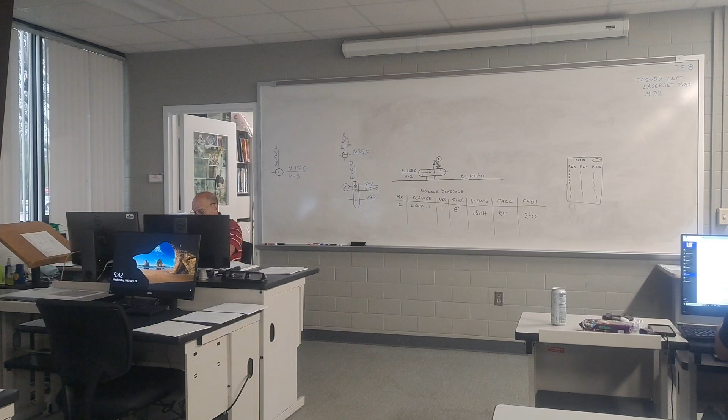So I've got some blank fitting makeup exercises, not tonight, y'all can take it home with you and work on it. I've got some of the blank fitting makeup handouts right up here, so y'all can take those with you and go home and work on it.

I want these back at the beginning of class next week. That way you've got time to possibly look at it, see if there's anything you do or do not understand, and see about making those corrections and getting them back to you.

So on these fitting makeup exercises, like I said, I have not recorded these grades. So whether it's this, or you take it and make changes, corrections, whatever, get those back to me so that I can record these grades. So right now, it's like they were never turned in.

You get a mulligan if you need it. All right, Colton?

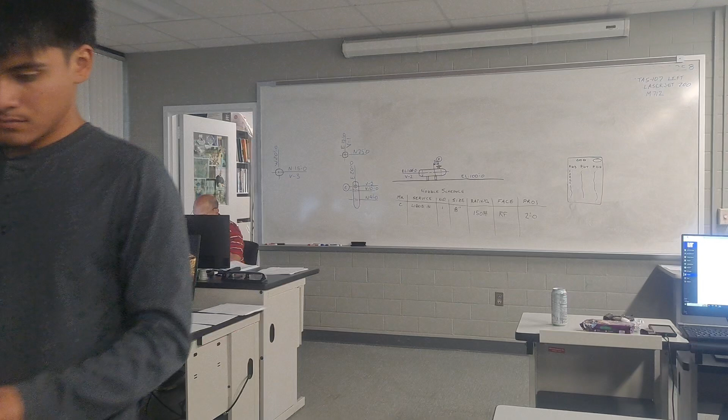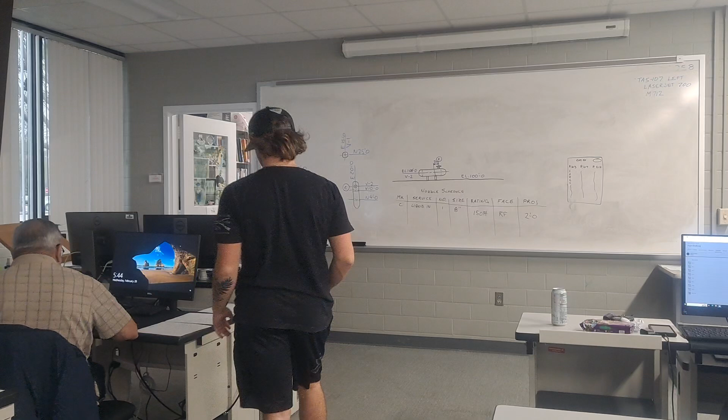Scott? You already gave me mine Friday. I got some other stuff for you too. Okay. Yeah. Hey Scott, do me a favor, move those 3 stacks up here, please.

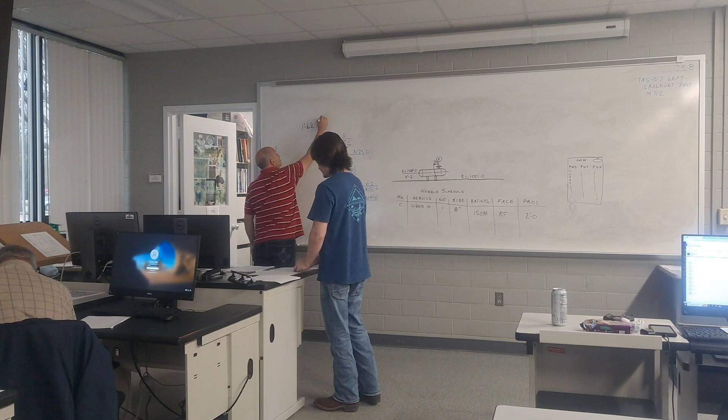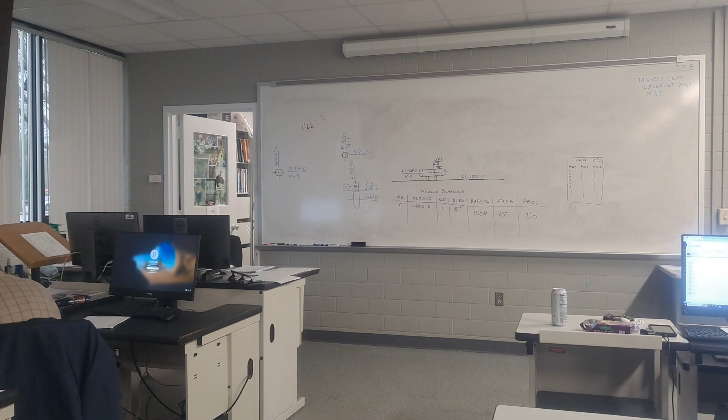If it is circled and has 1/2 written next to it, don't come up and say, but Mr. P, that's what I put there, was 6.5. No, that half means it is half off. That means you were within an inch of the correct measurement. If you have a red X through it, that means you're at least an inch plus off, incorrect.

So like I tell y'all about my self-checking, I want the same answer twice. I want to see the same answer repeated. That tells me that either I'm wrong twice, or for me, it's confirmation that it's correct.

So now that you've had time away from it, now would not be the time to go back and look at what you did last time and say, where did I make the mistake? Now would be a good chance to say, okay, I missed this one, it's got an X through it, it's more than an inch off. It's got a circle on it with a 1/2 next to it, meaning it's half off, so I'm within an inch. I would say, don't try to figure out the mistake yet.

Go through and do the math again from scratch. Look up the numbers, you got another whole week.

We're gonna talk about your chapter 8, 9 exercises. We're gonna review for your test next week over chapters 5, 6, and 7 reviews, and then chapter 9 exercises. The chapter 9 exercises, once maybe I give you some tips here in a little bit, maybe all that will clear up for you, and give you time to work on these over the next week.

Alright, so everybody clear about the instructions on those? What was some of the other stuff I may have rung up on that?

Oh, feet and inches. So if I rang you up for feet and inches, that also counted into your points off. Feet and inches means that you said 6 inches plus 8 inches plus 3 1/4 inches is so-and-so inches.

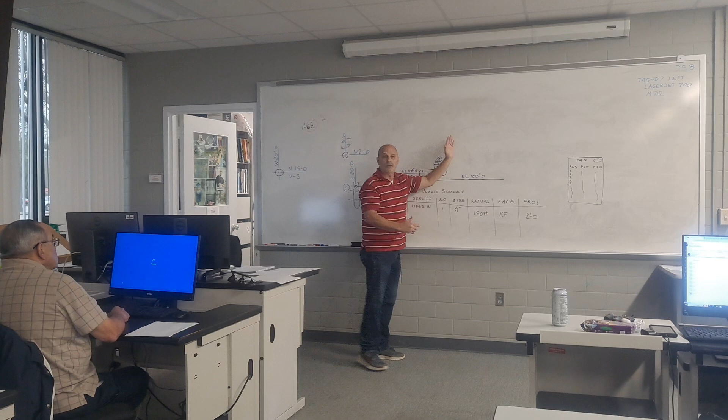You saw it in the control valve manifold. We don't need that measurement. It's usually not shown because there's an elbow, a reducer, a flange, gasket, valve, gasket, flange, reducer, elbow. It's fitting makeup. We don't measure that out. So little things like that, being able to add up and look up those correct fittings and the correct measurement needed is a big part of pipe drafting.

On your chapter 9 exercises, whenever you turn it in, you can use the same blank master I gave you for your chapter reviews. It has the chapter at the top, this will just be chapter 9 exercises, then your regular name and everything at the top corner. Make 3 columns, one for each of those 3 pages we're about to talk about. You've got 10 measurements to look up on each one. Just tell me 1 through 10, but put it all on one page so it's easier to reference back to and talk about how you may have made a mistake. Also just to see if you follow instructions.

So what you've got at the end of chapter 9, now we're starting to take all those different components we've been learning about, all those different fittings and pipe symbols we've been trying to absorb and learn what they mean and what they tell us on a drawing. Now we're starting to look at bringing all of them together and putting them together.

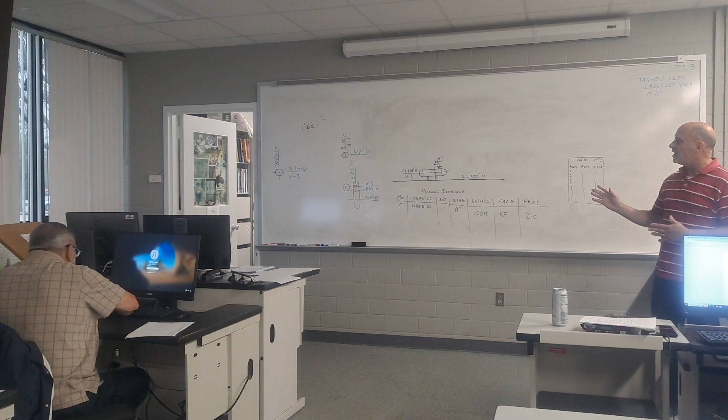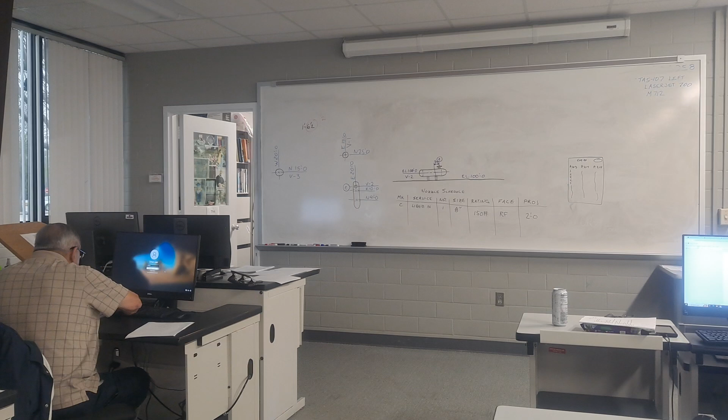So as a pipe drafter, one of the first things we have to do is find the equipment. Our pipe doesn't just start in space, your pipe is gonna start somewhere. Usually your pipe goes from equipment to equipment. You might not be doing the whole phase of that pipe going through it, but the normal pipe run, they call it a spool piece, similar to a spool that you can get thread or string on, has the fat ends on it. That's similar to a spool piece. That's where this term spool piece comes from, because we have a flange on each end.

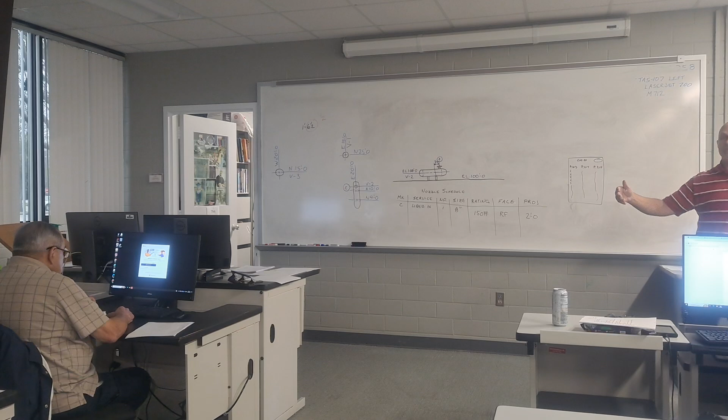That way they can bring that out to the refinery after it's been fabricated, painted, galvanized, whatever else, tested, x-rayed, bring it out to the refinery, put it up where we can't weld, we can't burn, we can't grind, put it into place, drop some gaskets in, bolt it up, boom, move on to the next one. So that's where the term spool piece comes from.

So as a pipe drafter, it isn't gonna be just a flange on this end, a flange on this end, and a piece of pipe in between. It's gonna be a flange on this end and another flange on the other end at a piece of equipment. And then somewhere in between, it's gonna have a bunch of other stuff probably happening. Elbows, T's, reducers, maybe some other lines coming off, stubbing out of it. We're gonna have valving. We might have some of these control valve manifolds in that run.

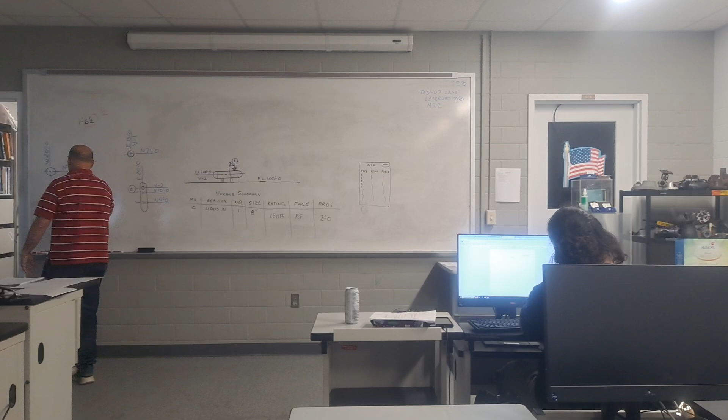So the pipe drafter goes through and says, okay, I'm going from this piece of equipment to this piece of equipment. Next semester we'll do chapter 10 in the advanced pipe class. But if you look through chapter 10, we're not gonna do the chapter review on chapter 10, so don't forget that from real early in the semester. If you work ahead, you don't have to do the chapter 10 review, we don't do that one, we pretty much skip over chapter 10. That's your spring break assignment actually, to look through chapter 10. We come back and do chapter 10 next semester.

So chapter 10 is very similar to where if you were in industry in an engineering department, in a pipe drafting engineering department at a petrochem facility, that is similar to the packet that would be given out to you. It's got what we call vendor data drawings, which is where we look up the different pieces of equipment to find out information about where our pipe is attaching to.

We've got different layouts of the facility that we'll go through and look at, here's everything, here's all these pipes. So if you can envision a bowl of spaghetti, looking down into that bowl of spaghetti, lots of times that's what these facilities look like. Every now and then you've got a meatball, that's your different vessels and stuff out there. But mainly it's just a bunch of, looks like spaghetti running around in there. You as a pipe drafter have to look at that spaghetti and say, okay, here's my pipe going from here to here.

It's not that easy, but what we do is go to what's called a pipeline list. That's our first stop. We go there and say, okay, the boss said I'm doing pipes number 5, 6, and 7. So you look on that pipeline list. It says pipe number 5 comes from this piece of equipment to this piece of equipment, pipe number 6 to this piece of equipment.

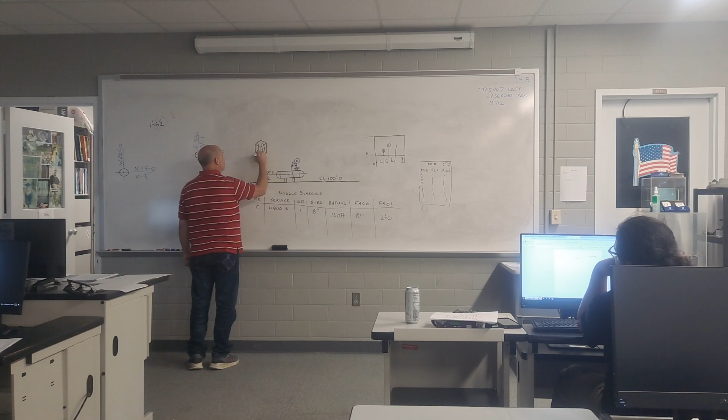Because once you get inside that refinery, they have what's called a benchmark, which is usually a concrete column, a concrete pier. It usually has some pipe bollards around it, kind of like what you see when you pull up at a convenience store to keep people from driving through the building—they're gonna have it well protected. They're gonna call that point 0, 0.

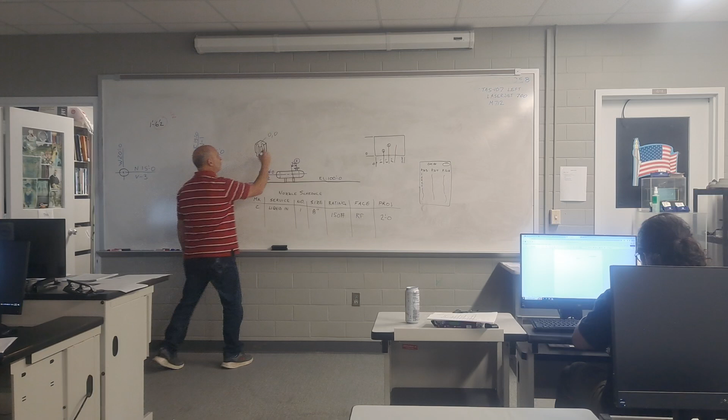They're going to give that a rough elevation of 100.0 feet. It's not a true elevation above sea level. Trust me, around here, you're not going to see 100-foot elevation in southeast Texas, not till you head up north, probably close to Jasper, or at least above Silsbee. So that is just a rough number that we use.

But what it does is it allows us to go out there and dig up to 100 feet if we drive some piers, some columns down in there to support all these big vessels. 100 feet is not a lot when you're talking about supporting that much weight and that much height. Some of these towers you see in these refineries, you would not believe what goes on underground right there.

So once we get out there, that 100-foot called elevation guarantees that we're probably not going to get into negative numbers. When I go out there and tell them to drive that pier down, and they're bidding that project, they say, well, how deep does it need to go? It needs to go to elevation 50-foot zero.

They know it's not an elevation above sea level, it's worked off that little thing out there, that little monument, that benchmark, with a little plaque on top that says this point right here, if you put your finger right here, you're putting your finger on 0,0 for this facility. You're putting your finger on 100-foot zero for this facility.

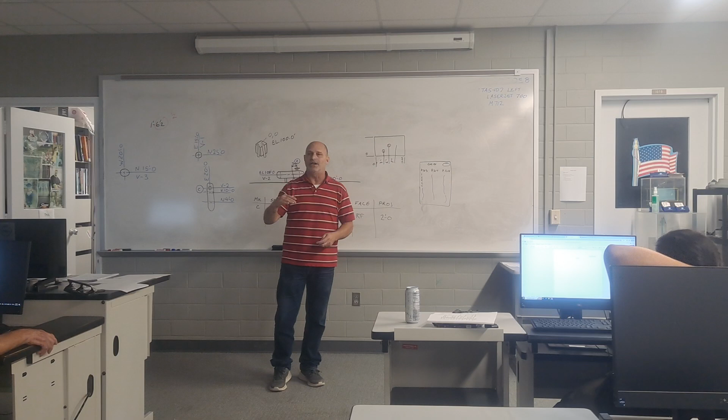So we go out there and tell them we need a pier that's down to 80 feet. We're not giving them negative numbers. We're not asking someone out there in the sweat and the heat and the mosquitoes and the mud to start doing math before doing something as critical as driving that pier down. So having that 100-foot zero guarantees we're not going to get into any negative numbers or require anybody in those conditions to do math on the fly to make sure something works. So this point will also be considered 0,0.

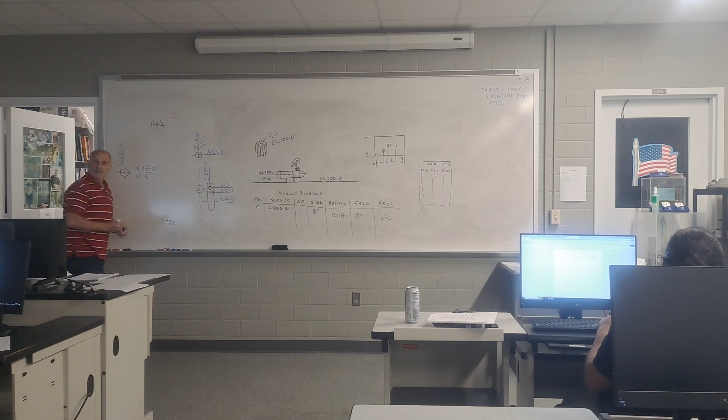So when I look at this vessel and it says the center of this vessel is at north coordinate 25-foot 0, east coordinate 15-foot 0, that vessel's name is V1, I can work off of that as a pipe drafter. But if it makes you feel better, just say there's some point out there, some little concrete pier, that has a coordinate of 0,0. So if I were standing at that coordinate and I walked east 15 foot, and then walked north 25 feet, I'm going to be at the center of that vessel.

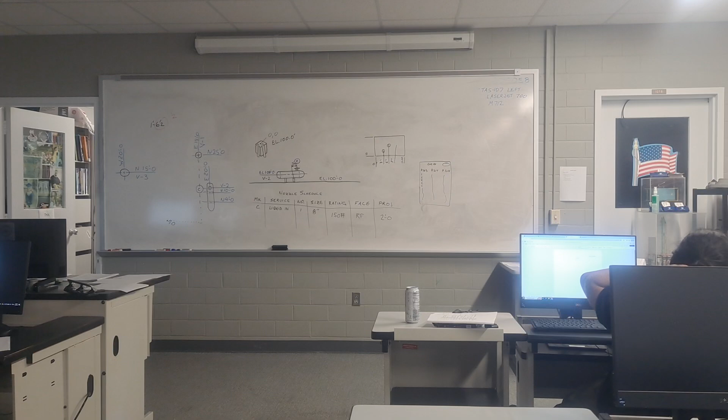2 decimals of a foot is what we can go to. That allows me to tell someone where to go to an exact location inside that facility. They can have some kind of instrument that will reflect back to that monument and say you are this far, just like we do with our phones, just like GPS that's based on global satellites. This is based on that little marker somewhere inside that refinery.

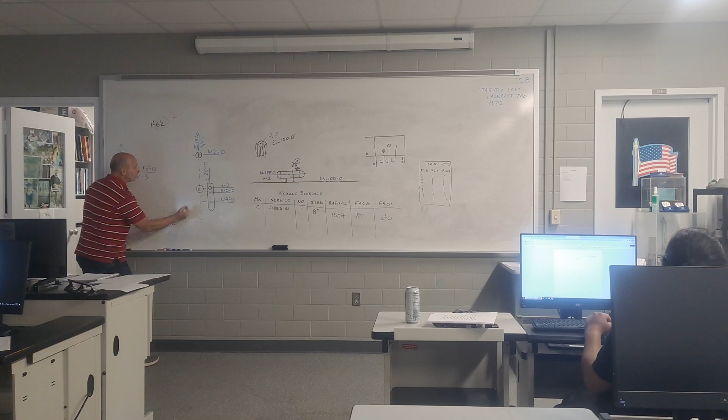So if it helps you to work on these, get out a piece of graph paper and make a dot somewhere and say okay, that's 0,0. This coordinate means, instead of cluttering the drawing with all these dimensions, we're just giving you information from a point called 0,0 on how to get there: north, south, east, or west. It simply says walk north or south this far, walk east or west this far.

You will find that piece that you're looking for. And we're not talking about 30 or 40 foot, we're talking about inside a refinery - 2,000 feet north, 1,753 foot 2 and 7/16 to the east. And they're going to be able to find whatever it is they're looking for. Maybe it's something big like a vessel, they see it way before they get there.

Maybe it's something small like a valve, or a hand washing station went out. We can tell them using these coordinates exactly how to get there. We're not going to say go 3 roads down through this facility, this rack right here, take a right on that road. No, because someone may get off in a unit that they're not supposed to be in.

When I was at Unica, I worked construction. Me and the guys were walking to the dining hall over there inside the refinery.

We're like, and that rotten egg smell can't be good. I don't remember what chemical it was, but we were shortcutting to the dining hall. We walked right through a very harmful area, as far as, you're supposed to have breathing apparatus when you walk through. It can't be good, it smells like rotten egg. That's one of those bad smells you ain't supposed to smell. So we took a big deep breath and walked on through.

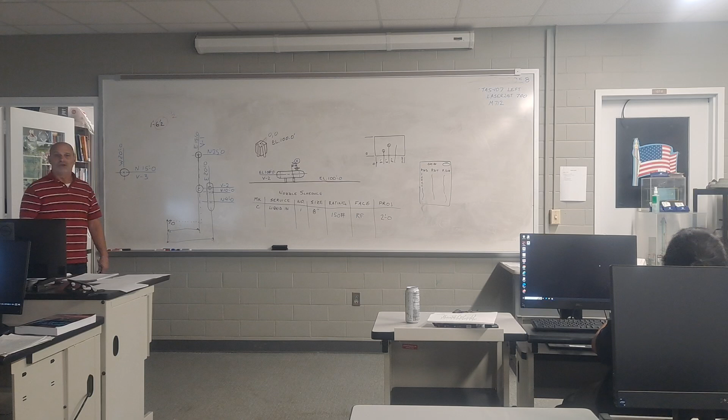But we don't want people doing that. We don't want them to accidentally do that, or turn a truck onto a road that they think is a road because we said go down three roads, but this was just a turn-in. They thought it was a road, so they threw the boom around the corner, and by the time they can see around the corner, they've already done some damage to something.

So this gives us a tracking point to be able to locate items out there. And like I said, envisioning a point called 0,0 will help you.

What questions we might have is, what's the north-south distance between V1 and V3? We look over at V1, we find our north-south coordinate there. We look over at V3, we find our north-south coordinate there. What I always recommend is write them down. Write one of them down, then look at your second one and say, is it bigger or smaller? If it's smaller, write it below it.

That's just a habit I picked up, something I learned to make it easier on me, to always have that larger number on top. So I'll get a blank piece of paper with lines on it, and write one coordinate down once I find it, instead of trying to find both of them and hold my fingers on it. You're gonna see on page 214, it isn't that easy.

You can't just look right there, there's one of them, look right there, there's the other. No, you're gonna be flipping through chapters, so you write both of them down. Our rule is, if the coordinates are the same, like coordinates, north and north, the rule is subtract to find that measurement between.

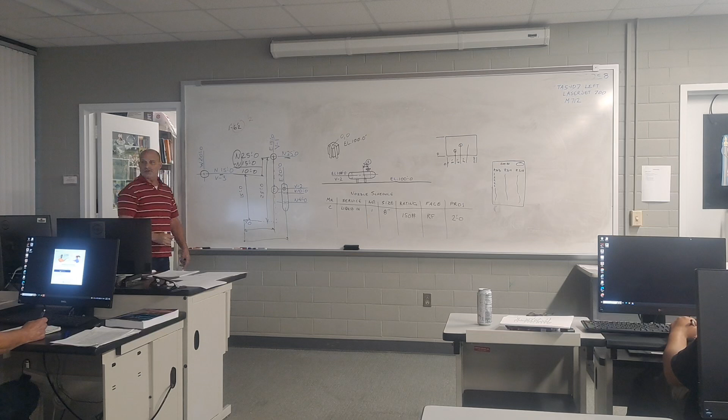Well, if this is 25 and this is 15, I can visually see that, okay, yes, I did the math right, that number should be smaller, I should be subtracting. So it may help to have that visual of 0,0, showing this 25 foot 0 means go to the north from this point, 25 feet. Go to the east from this point, 15 feet. If it helps having that graph paper with that 0,0 on there, feel free to do it, because there's a lot of room for error on this assignment.

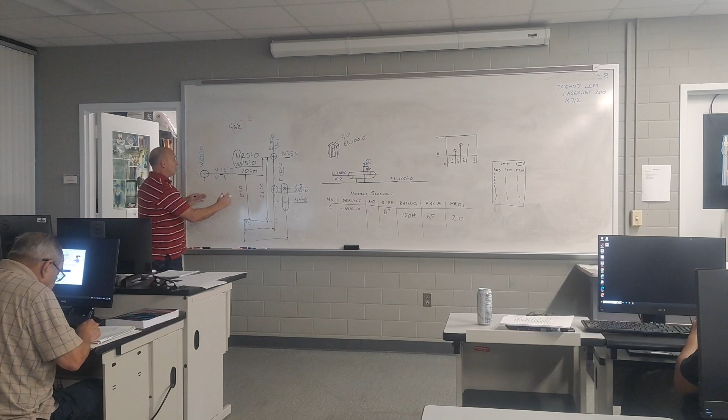So maybe I have the question of, what's the measurement between V1 and V3, the east-west coordinate? I look at V1, I pull an east coordinate of 15 foot 0. I look over here at V3, I pull a west coordinate, it's larger, 20 foot 0, so I write it on top. Unlike coordinates, we add 20 plus 15, 35 feet between them. That would be the answer to that.

Once again, this vessel says from this point, go to the east 15 foot 0 to get to the center. This vessel says from that same point, 0,0, go to the west 20 feet. So this measurement is 20 feet over, this one is 15 feet over. The overall measurement, visibly, I can see that I should add those. Like I said, a lot of room for error.

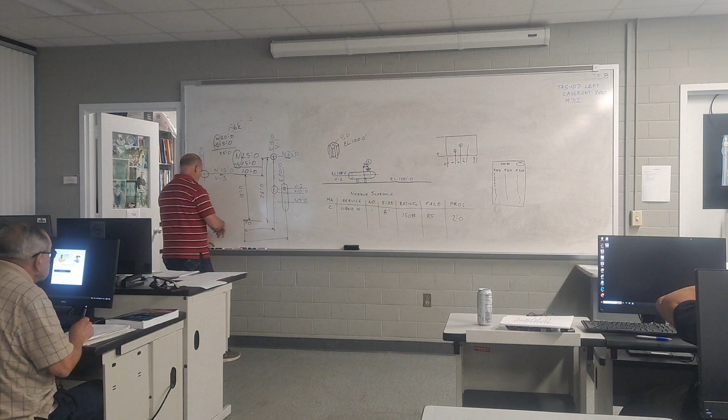Here's another place where people make mistakes. Remember, all this is gonna be a plan view. Anytime we're looking at these coordinates, unless we're told otherwise, we're understood to have north vertically up.

So on this vessel right here, if I were to ask you, what is the north-south distance between nozzle C on vessel V2 and V1, the center of V1? You look over at V1, you say, okay, here's my coordinate here, north 25 foot 0. Then nozzle C on vessel 2, here's vessel 2, here's nozzle C, coming right here in the middle of it. So I've got some coordinates running through it, but this north coordinate does not go through the center of my vessel, or the center of my nozzle. That north coordinate, let me write this up here to look a little bit better for you.

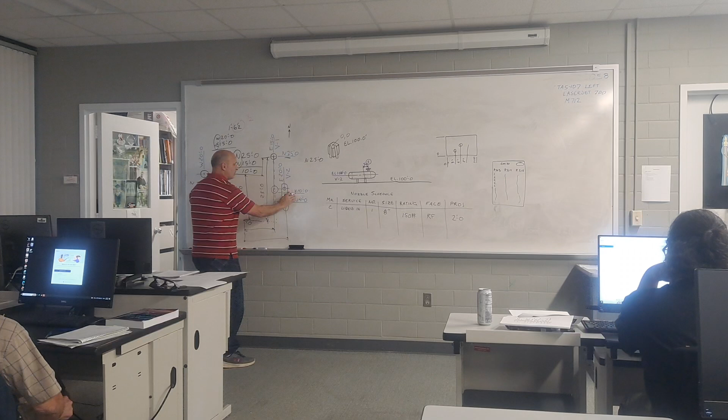There isn't a north coordinate on nozzle C. So some people say, well, I got a north coordinate on this end, there's one right there by it, north 10'0". Like coordinates, I'm gonna subtract 15'0" and move on.

That did not get the information you needed. You need a coordinate on this end and a coordinate on this end. You don't have a coordinate on this end. You've got a coordinate near there.

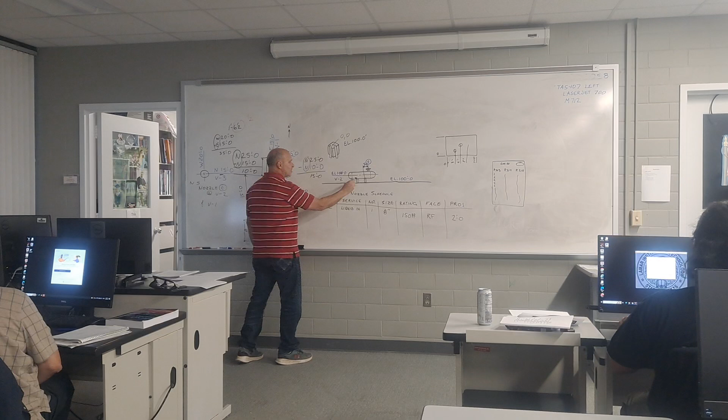So in a condition like this, what I would have to do is something we learned about in chapter 6, the vendor data drawings. I would have to go over to the vendor data drawing for this vessel, which I did a little sketch of over here. And I said, okay, this vessel, here's my side view of my vessel. Here's some concrete supports underneath it. Here's my walking surface out in that facility.

We've got an elevation down there. We've got an elevation at the center of the vessel. We look over here, there's our nozzle C. There is a measurement from that support underneath that vessel, that concrete support, just like we have in this glass box over here, just like they have in your chapter 6. That concrete support, those legs underneath that vessel.

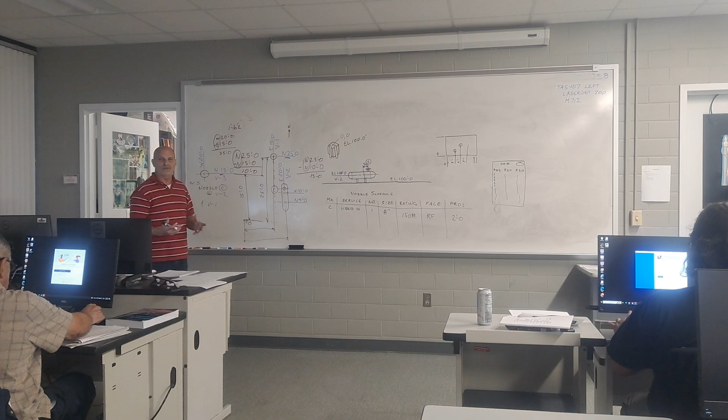We have a coordinate right through the center. Now we have a measurement from there to our nozzle. Mr. P, why did they put that coordinate there? Why didn't they just put it in our nozzle? Because our nozzle isn't as important as that support under there.

That support under there has to do with the civil department. They've got to build the concrete for it. The vessel people need to know where that support is and how to get to all the nozzles on it. The only person that needs to know just how to get to nozzle C is the pipe drafter. They're not going to go out of the way for each individual pipe drafter.

That vessel, I showed one nozzle on it. What if that vessel was a typical vessel that might have had 30 or 40 nozzles on it? So now they gotta show a coordinate for all of them. So one pipe drafter doesn't say, well, they didn't show my information.

When you get into this, and something you'll find out a lot next semester, and a little bit in this chapter 9 exercises, is that these drawings that we're working off of are not geared for the pipe drafter. They're not geared for the pipe drafter just to look over there and say, all right, first semester AutoCAD, there's my measurement, there's my numbers I need right there, click, click, click, type, type, type. It's not like that. The pipe drafter may spend as much time gathering information as they do drawing that piece of pipe.

Because the pipe drafter has to say, well, that's great they gave us that information. That's not what I need. But I can look over at this vendor data drawing and say, okay, from that support, it's a measurement of 2 foot to the center of my nozzle. From that support, which is what gets me, the vessel department, the civil department, gives us the info we need. From there to nozzle C is 2'0".

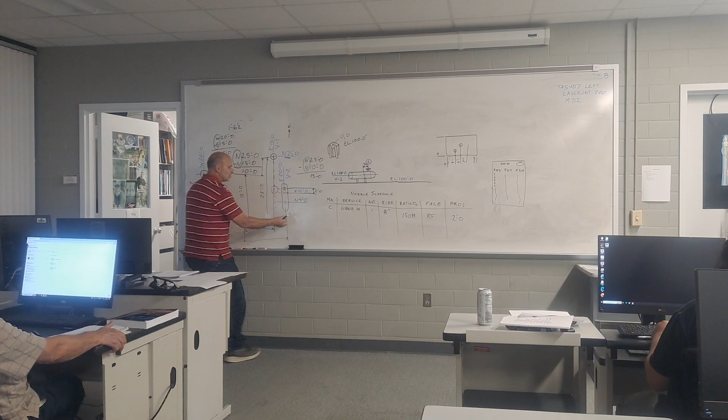So if this is north 4'0", this is north 10'0", I'm going another 2 foot. That's gonna be north 12'0", so I had my 25 from up there. Now I've got a coordinate here. I had to look up some information, do a little bit of math, but now I've got a coordinate there. Now I can do the math, find the distance in between.

So when you get to the second exercise at the end of chapter 9, the one that's on page 214, it's not gonna be like the first page. The first page you're gonna look at and say, oh, this assignment isn't that bad. Why did he go over all that instruction? Look, it's all right here. It's just a matter of math. I can see it. It's easy.

Not everybody's gonna be able to see it on that first page. Not everybody's gonna click on that first page. That's why I did all of this. And then you turn to the second page and say, well, uh-oh, this just got real.

Well, on the second page is where you're gonna have stuff like this. It's gonna ask you for a measurement or a dimension to one of these nozzles. You're gonna have to go find that vessel. You're gonna have to go to that vendor data drawing. You're gonna have to look up some information about that nozzle to be able to go back and do your math for the answer you're looking for.

Here's something to make note of. When you're doing that second page, you've got 4 facilities, four little units: unit 01, 02, 03, and 04.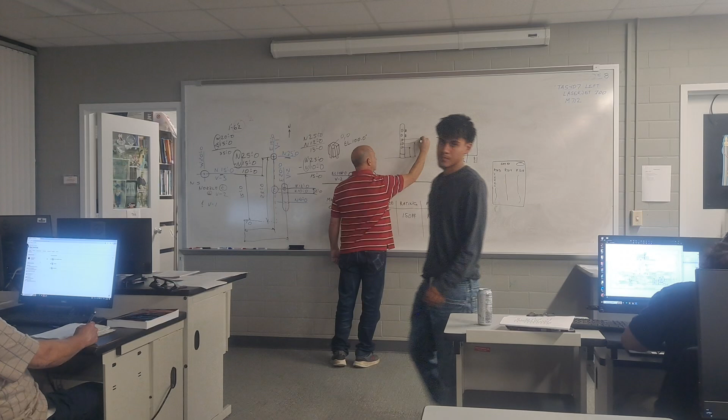On that view, what you're working with is called elevations. Elevations are just heights, same thing as over here. If I had a vertical vessel with all these nozzles coming off of it, instead of showing a measurement like this and another here, steadily getting more expansive, I've got to switch to this side because I've got nozzles on that side too. Before long we're starting to lose our drawing because of all the dimensions coming off of it. But we have to show that information.

So once you get out into the petrochem world, we rarely show any true dimensions like what y'all have been learning to do.

Mr. P, why did we spend so much time? Well, if you took me for your CAD classes, you didn't spend a lot of time on dimensioning, because once you get your dimensions set up, if you can draw it right, you can dimension it. Once you get out into the petrochem or real world industry, you find out you don't show hardly any dimensions at all. Architecturally, we dimension everything because someone's gonna be out there with a tape measure measuring that stuff. Most other industries, no, we dimension in other ways, such as this.

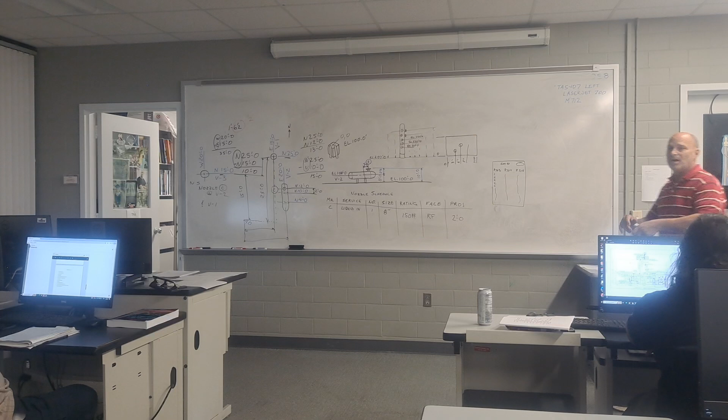Here's the kicker: as a pipe drafter, that is where our work starts. More specifically, it starts on the other side of that gasket that will be between that flange and our pipe - that 1/8 of an inch gasket we learned about in the flange chapter, chapter 5 I believe. We talked about anytime you have two flange faces, whether it's two flanges, two of these dudes sandwiched up to each other, maybe it's one of those and a valve, a flanged valve. Anytime we have two of these metal surfaces being bolted together like that, we can't have that commodity getting out.

What if that flange got dropped while they were on the way over there to fit it up to make that pipe system? What if when it was being shipped it got a ding, another flange got dropped on it when they were stacking them up? They're carrying a pallet of flanges over on a forklift, maybe they tumble over. A lot of things can happen to that metal face of that flange that says, hey, that thing's not gonna seal on. We gotta have something squishable, something pliable in between those two metal surfaces that we can squish in there and fill all those imperfections. That's the gasket, that's the purpose of the gasket - making a leak-proof connection.

So as a pipe drafter, we say, okay, I can calculate my way up. This is an 8-foot measurement, that's a 2-foot measurement. That means the face of their flange is at elevation 100 foot 0 inches.

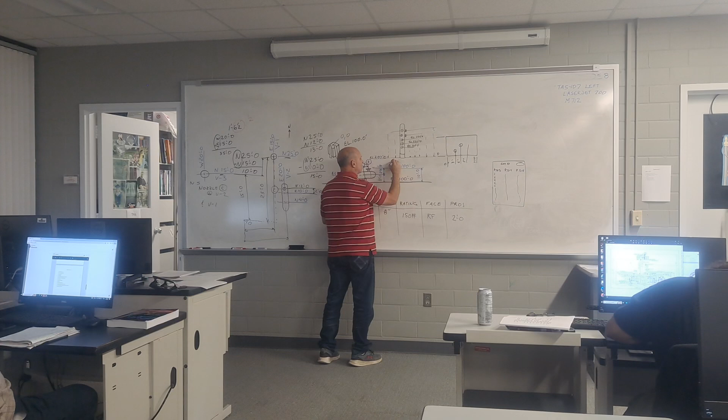Me as a pipe drafter has to say, we've got a gasket right there of 1/8 of an inch. So when I'm calculating my actual elevation for that end, it's 0 and 1/8, because that's where my pipe starts at. I'm gonna throw a gasket in there, but that's not gonna be part of my drawing. My drawing will physically start at the face of my flange.

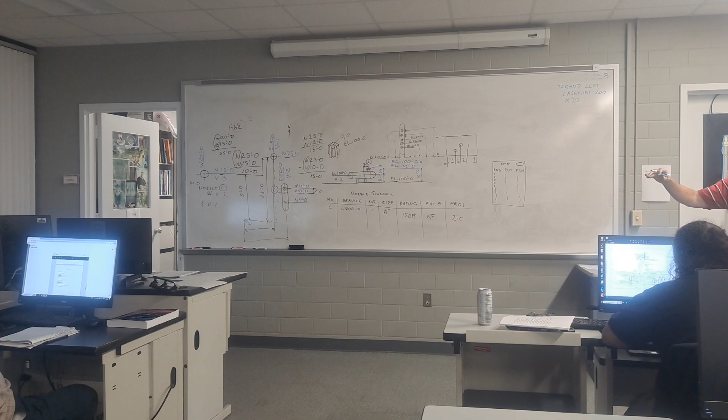So next semester, when you're starting to draw and calculating this stuff, remember, here's what they give us: 8 foot to the center of the vessel, 2 foot to the face of their flange, 1/8 of an inch for the gasket. Boom, that's where my drawing starts at as a pipe drafter.

That 1/8 of an inch, depending on the number of double flanges or flanges and valves that you have, if you forget to account for it, just like some of you saw on the fitting makeup I gave back a while ago, over the course of a spool piece, if it starts at a flange and we've got a valve, another valve, that's 1, 2, 3, 4, 5, and then another gasket on the end, that's 6 gaskets just in that straight run, 6/8 of an inch, 3/4 of an inch. That ain't gonna work. They're not gonna be able to get that pipe in there.

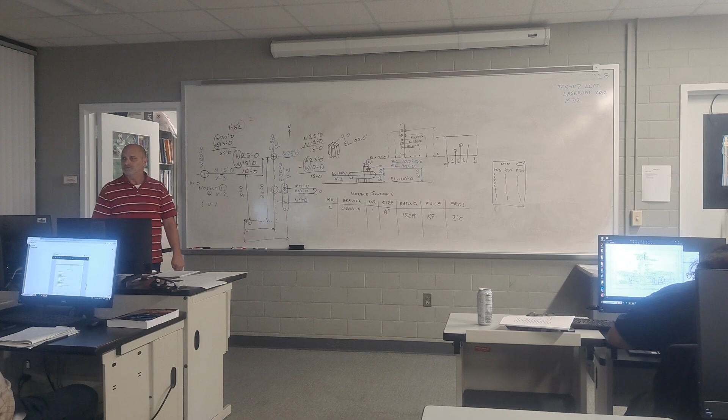That's not gonna happen too many times with the same company. Oops, I forgot the gasket, boss. Look, we had to shut the job down. What do you mean, sorry? You're bad. No, your box, your desk, put it in there and head out. That's what it's gonna be.

After a while, it's not gonna be your first mistake, but it will happen if you allow that to happen. If you're okay with just forgetting an 1/8 of an inch, boss, that pipe's not just going from here to here, that 1/8 of an inch is gonna come into play. It's gonna add up and it's gonna make something wrong.

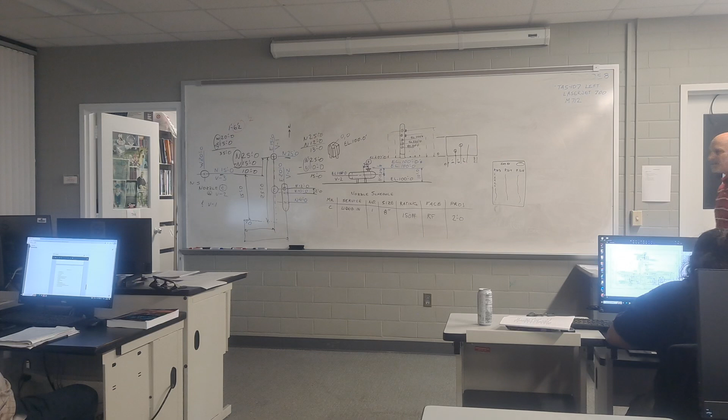So any questions on the chapter 9 exercises? Like I said, each one's got 10 questions and answers, their measurements, elevations that you gotta look up. 10 fill in the blanks. Put them on a document, just in Word like that, type them up. I don't need the handout, I don't need to see your math, but if you have it, that'll help.

This is one of the tests that we usually do during the semester. I've got 2 or 3 that I flip-flop around with, but this is one that's gonna be very critical next semester, when you come in here and I'm trying to teach you how to draw and calculate lengths of pipe. Doesn't sound familiar, Mr. P? Yeah, you'll remember these exercises, you'll remember the test, and you'll cuss them, and that's okay. But you'll learn it, because it is something that pipers do day in and day out.

That's how we get our information. It's not first semester, second semester, here, honey, draw this. It's, hey, here's your stuff, you're doing these pipes. Come see me if you need something, but I really don't expect to see you, and I sure hope I don't, because it's all in there. All you gotta do is look for it and find it. That's what it's gonna be with these pipe projects.